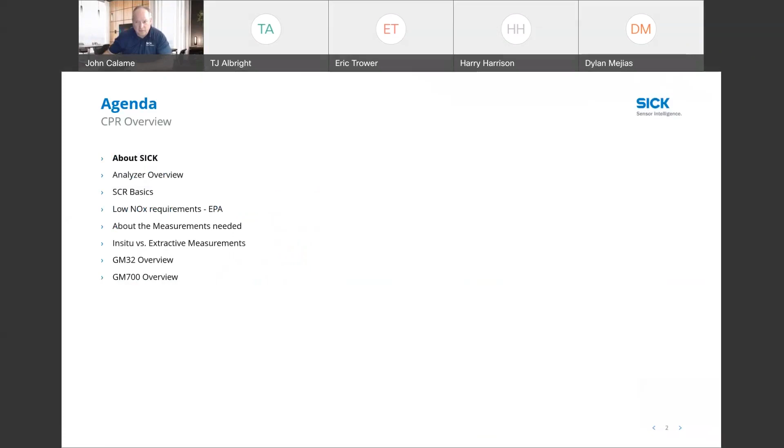Good morning. Thank you, Eric, for the introduction. Today, we'll be discussing analytical measurements to help meet the EPA NOx regulations. I would like to give you a quick overview, for those not familiar with SICK, of our capabilities and our footprint.

Erwin Sick founded the company more than 74 years ago. It's a privately held, family-owned company, grown from just a garage operation to 11,000 employees worldwide. A great success story, global coverage, and over $2 billion in sales globally.

We have a really wide product and technology range. Lots of sensors. You may have heard of us for analyzers or for flow meters, but we have over 40,000 products that we produce. One of the great things about working for SICK is they put a lot of money back into R&D. We reinvest 10% of our annual revenue back into new innovations and new products.

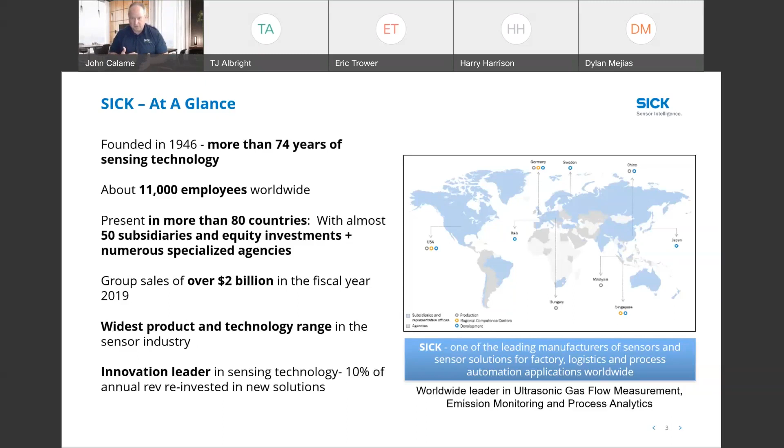If we go from left to right, one of our divisions, our global business centers, is responsible for presence detection. We have lasers, high precision lasers that measure from micron to mile, so very precise proximity measurements. One of the very first products developed by Erwin Sick was the industrial safety light curtains, which you may have seen in factory automation. They protect employees from machinery and injuries. We'll do the complete safety audit for you and a turnkey system.

The analyzers group, which I work with, I'm the market product manager for. We have both compliance analyzers as well as process analysis solutions. For flow measurement, we have a very robust offering for ultrasonic flow measurement, one of the leaders in custody transfer measurements for natural gas. We also have a very robust flare flow metering, which is a very challenging application that we do quite well and are known for.

Then we have app space and industrial integration, so customers as well as us can take our products and develop custom applications and designs. We also have a systems integration group where we can take third-party products as well as our own and integrate them into complete solutions. Then motion control, we have rotary linear encoders, contacting and non-contacting. And for trace and track, we have identification and measuring RFIDs and 2D cameras for that business.

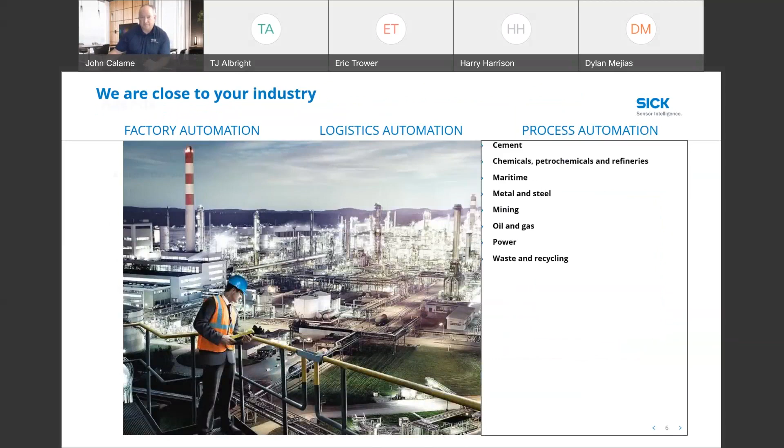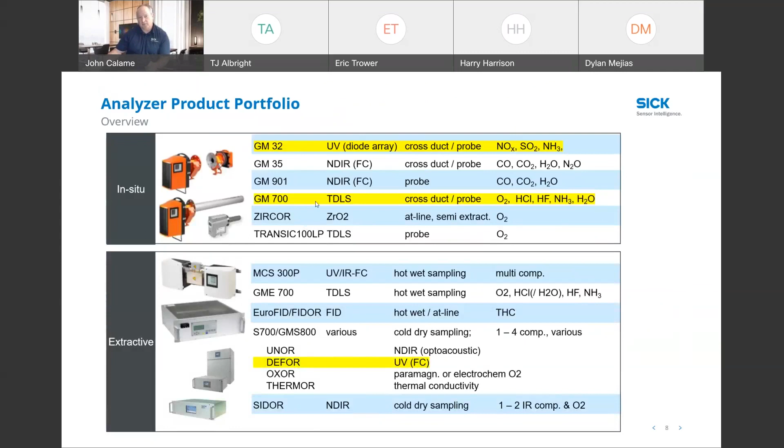To get into our analyzer portfolio, we have both in situ and extractive. In situ means the analysis is taking place in the process or in the stack. Extractive means there's a sample system that's conditioning the sample and bringing it to the analyzer for analysis. The key analyzers we'll discuss today will be the GM32 and the GM700, TDLS, and the DEFOR.

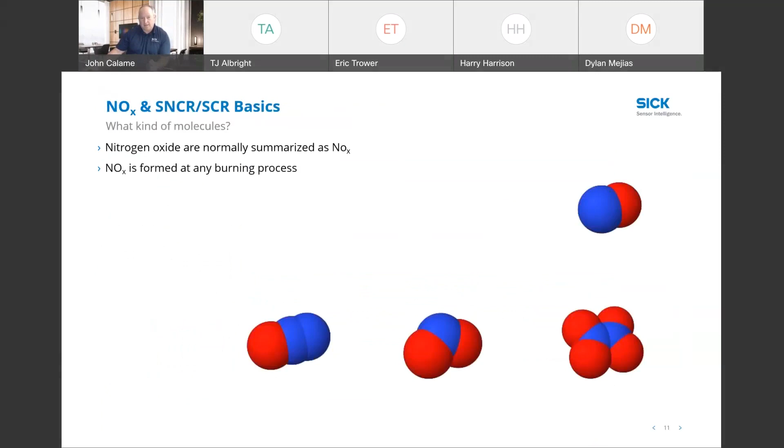Just to show you, we have a broad offering, certainly O2 for combustion control, and then we have a MERCEM for mercury, a variety of different other analyzers to meet both your compliance and your process measurement solutions. But today we wanted to talk about NOx. So what is NOx? Nitrogen oxide, or oxides of nitrogen. It comes in many forms, and it's created during the burning process or combustion. We're also going to talk about the DeNOx process and some of the removal methods for NOx.

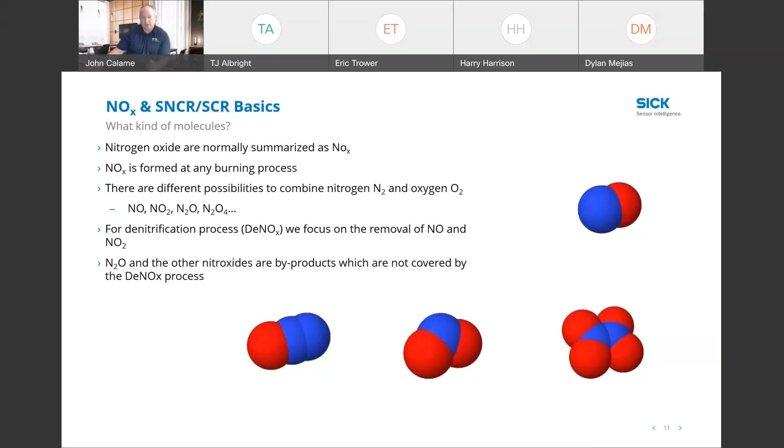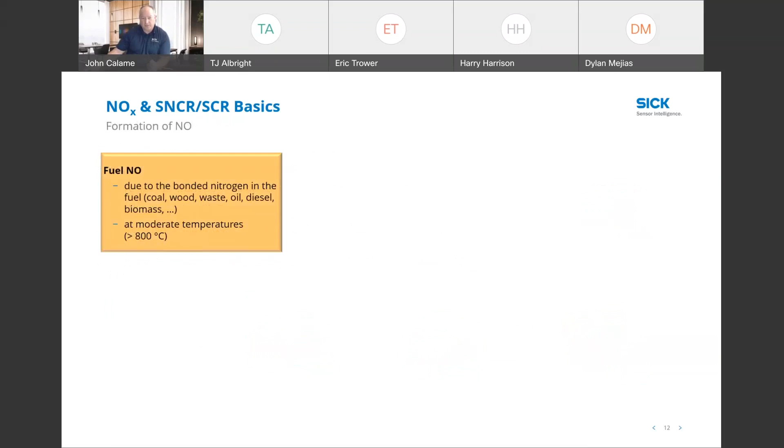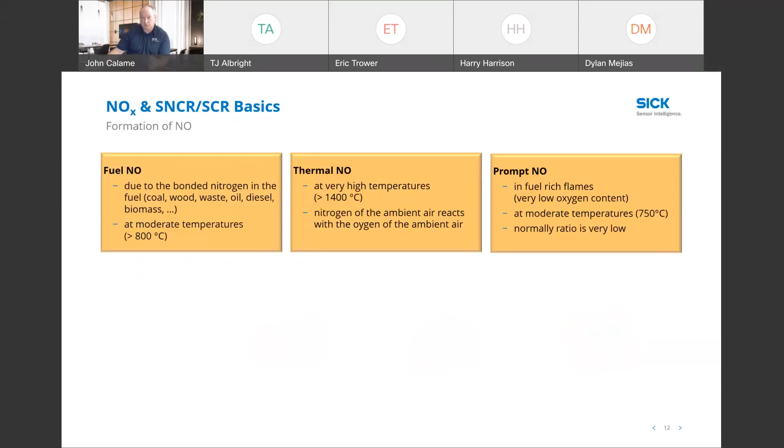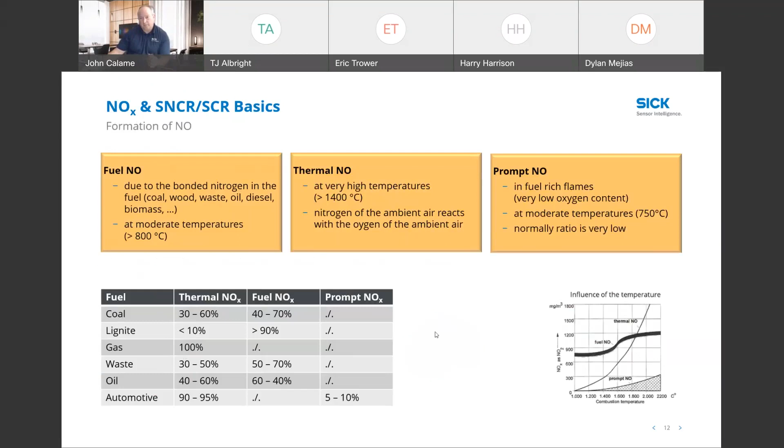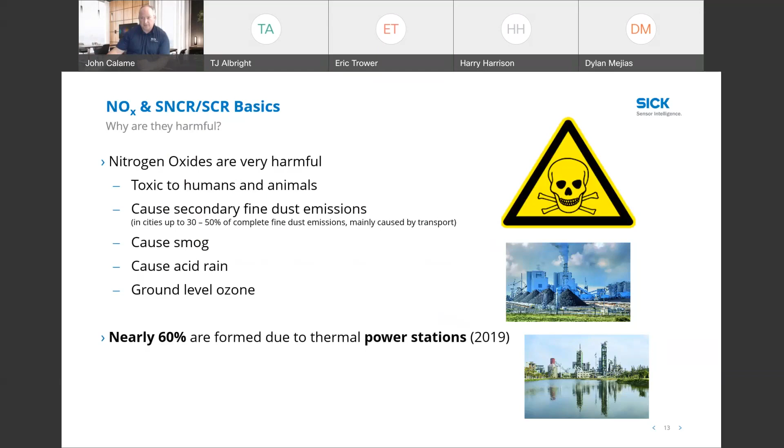So why would we measure NOx? Of course the EPA has guidelines, and we have to do that to be in compliance. But the main reason is that there are harmful effects from nitrogen oxides - it's toxic to humans and animals, it can cause smog and acid rain, and contribute to ground level ozone. A lot of thermal power stations and power plants create and account for quite a bit, but there are multiple sources - automobiles and any combustion process can produce NOx.

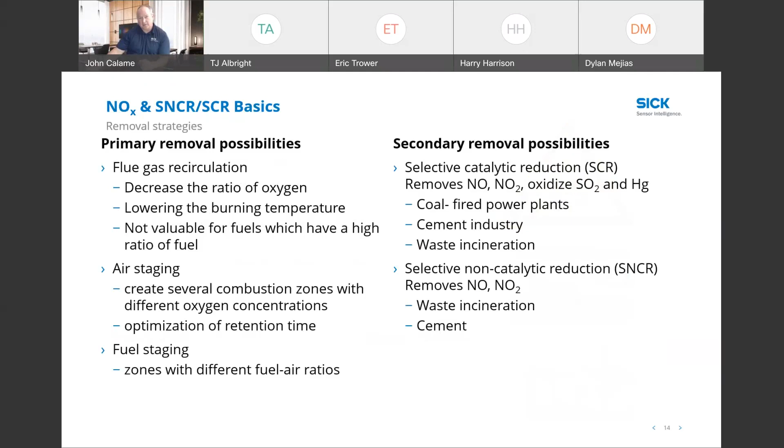So there are several removal strategies. The ones we're really going to focus on today are SCR, selective catalytic reduction, and SNCR, selective non-catalytic reduction. But there are other ways to remove or mitigate NOx, like low NOx boilers, or increasing combustion efficiency to make sure you're not in a fuel-rich situation. So there are multiple ways to mitigate NOx, but whatever strategy you use, you still have to measure the effectiveness of that and meet your permit requirements via EPA or state guidelines.

To explain the two briefly: selective non-catalytic reduction uses direct ammonia injection to convert NOx into water and nitrogen. Selective catalytic reduction uses not only ammonia injection but also a catalyst - injecting the ammonia prior to the catalyst, reacting all the NOx that's in the stack, and then converting that to water and nitrogen.

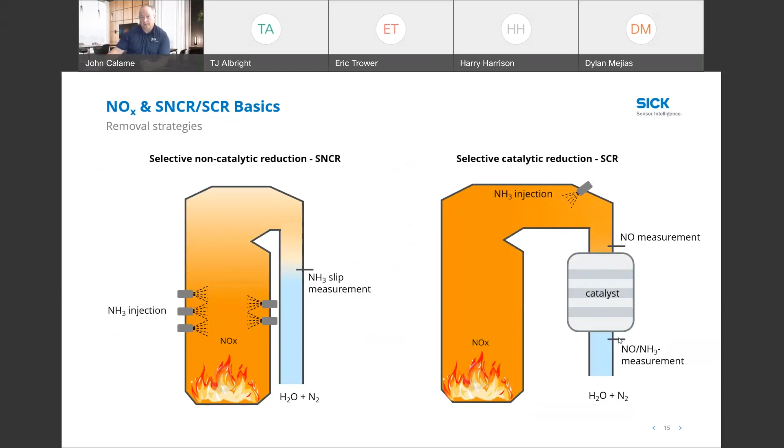So the SNCR principle and the reduction removal of NOx - both are viable. We're not promoting either or, it depends on your specific application, what your loading is, your NOx levels, your fuel types. There's a lot of things that go into selecting the proper removal technology.

But what we do very well is have analyzers that measure the ammonia and also the NOx in situ, which is a real fast measurement, and it allows you to optimize either the SNCR or the SCR to make sure you're not over-injecting ammonia. If you over-inject ammonia, there are effects of reducing the cost or life of the costly catalyst. Also, ammonia is not cheap, so you can reduce the amount of ammonia used as well. So there are financial reasons why you want a device that gives you tighter control, allowing you to optimize the performance of the removal technology selected.

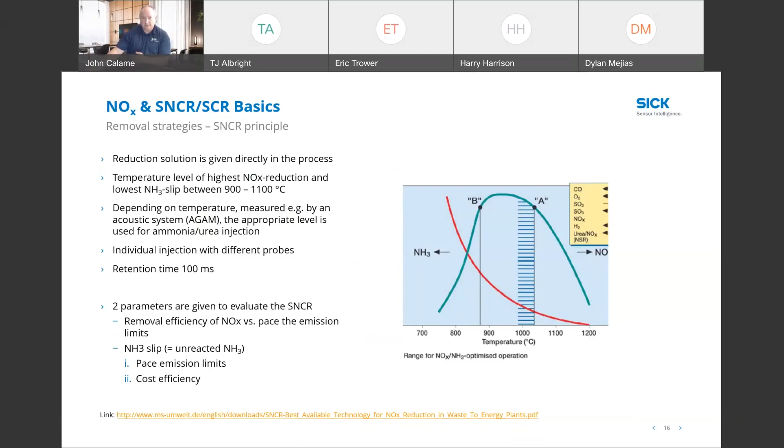So the SCR principle we're moving to is actually using that catalyst as well as the ammonia injection. What we're doing is measuring that slip that comes through, the ammonia slip. What we call ammonia slip is - you want enough ammonia in there to fully react and remove all of the NOx. The only way to measure that and make sure you're going to have enough is you have a little bit of residual on the downstream side that's going to break through. So we're measuring that really low level breakthrough to make sure you have enough catalyst or enough ammonia along with the catalyst to effectively remove the NOx.

Yeah, this is Dylan. For that low slip, you're looking at probably sub 5 ppm, really sub 2 ppm of ammonia for an optimized conversion. So you do need a device that's very accurate on the low end. A lot of devices out there are good to the 0 to 25 ppm range for ammonia, but when you look at that low measurement and high accuracy at that low measurement, you're going to be leaning more towards something like a TDLS, which I think John's going to be talking about here in a bit.

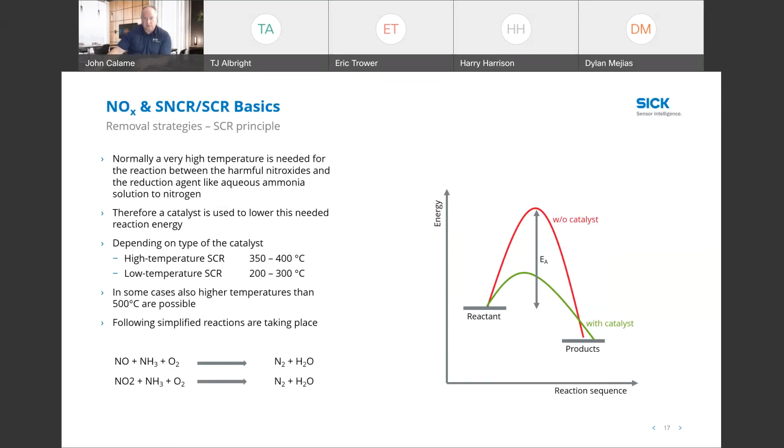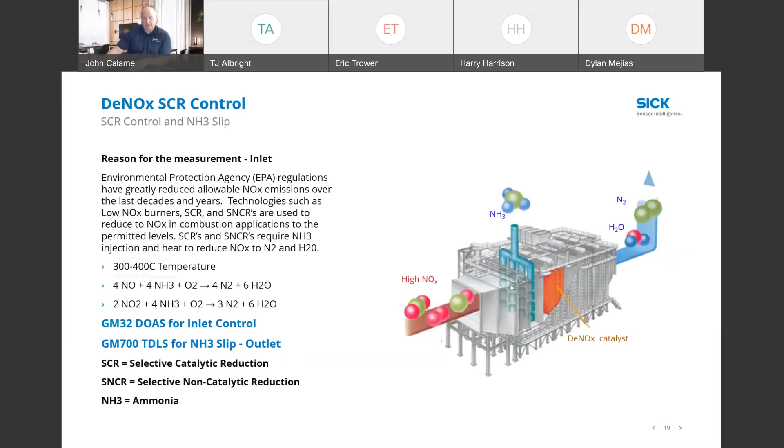For SCR control and ammonia slip, a picture's worth a thousand words. You have high NOx coming in from the stack, going into the SCR, and you're injecting ammonia prior to the catalyst bed. It reacts and converts the NOx into nitrogen and moisture, which are benign components naturally occurring in the environment. That's the basic premise of how SCR and SNCR work.

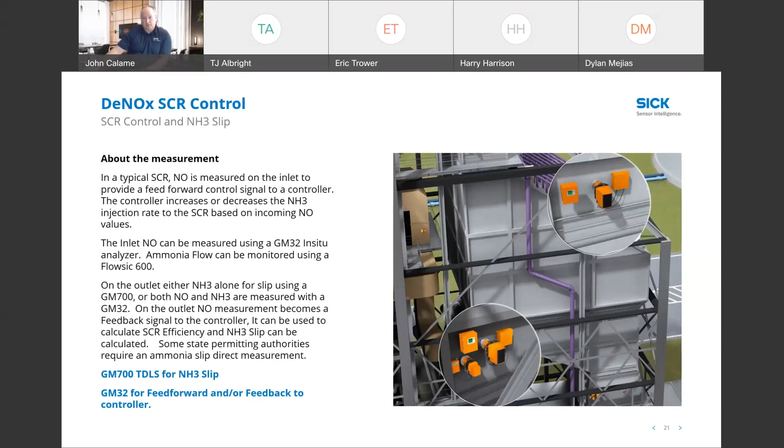The DeNOx and SCR control shows a typical install with our devices, where we have the GM32 on the inlet measuring the actual NOx, giving a feed-forward signal over to the ammonia injection so they know the loading and NOx levels, so you know how to adjust your ammonia feed and not overfeed. Then we can measure, with the GM700 TDL that Dylan mentioned, the ammonia slip quite accurately, so you know what's slipping through and can ensure the proper amount of ammonia. We give you the feed-forward to optimize control.

We've talked about the benefits of proper injection control. One is that too much chemical can cause corrosion. We also talked about catalyst life—some catalysts are very expensive, several hundred thousand dollars—so you can extend their life, and there's a definite ROI calculation that provides significant cost savings. Also, storage of ammonia and the product itself isn't inexpensive, so if you can reduce the amount you use, you reduce the total operating cost of the removal technology.

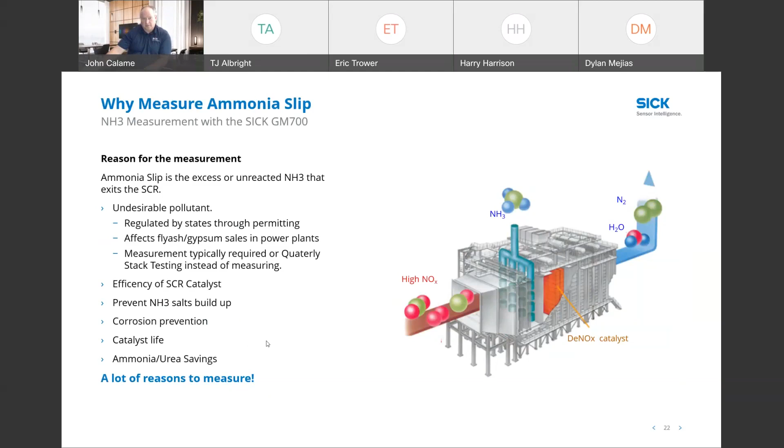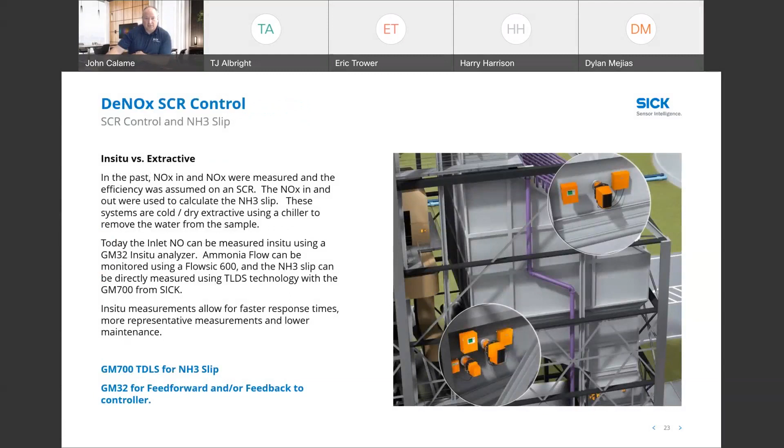But we also manufacture and supply hot-wet solutions, where we keep the sample above the dew point as we extract it and bring it to the analyzer. It's heated—heated sample line, umbilical, pump—all the way through the analyzer, staying hot above the dew point. It's a robust system for applications with high particulates and for measuring acids that might otherwise condense.

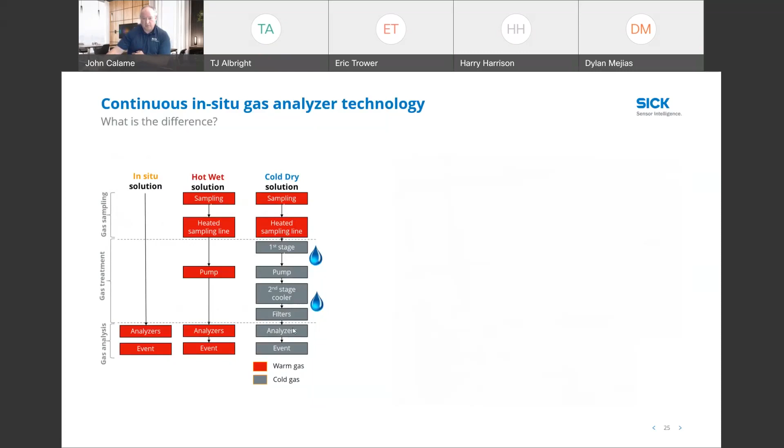We can also do hot-wet extractive or cold-dry extractive strategies. A lot of the cold-dry extractive method is used on traditional CEMS measurements for NOx. All have their pros and cons. The cold-dry system has more components because we're doing extraction, cooling, and dropping out moisture—there are many filters, so more components are involved.

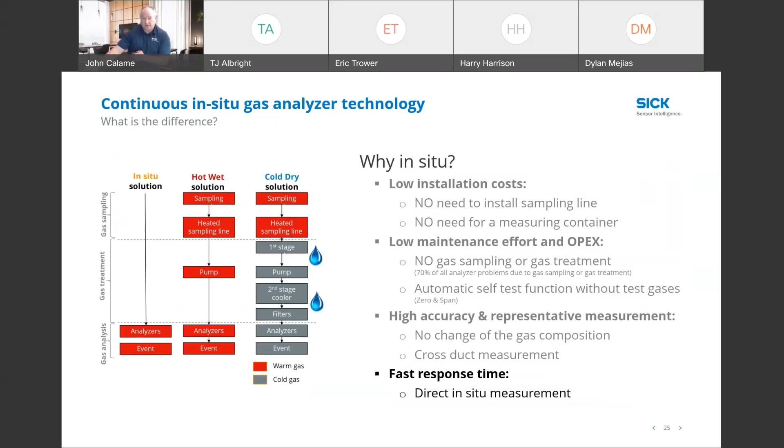The best thing about direct in situ measurement for controlling and optimizing is the speed of response—being in the process rather than dealing with an extracted sample's delivery or delay time. Dylan, anything you wanted to add to that? No, nothing on this.

One of the huge advantages of the in situ device is our capability to mechanically perform daily validations with zero reflectors and span filters, doing daily checks and verifications without calibration gas. We all know calibration gas, cylinder gas, is expensive to procure and maintain. Think about how much a cylinder of gas costs you—if you had to do that 365 days a year, maybe going through a cylinder per quarter, that's four cylinders, or maybe one a month.

You can do your own calculations on how much money that would save you. And we all know the analyzer is guilty until proven innocent. So if you have to challenge the analyzer, or if there's a challenge from operations that it's not working, you can physically hit it with a digital signal, send it to the analyzer, and then you have positive indication of performance.

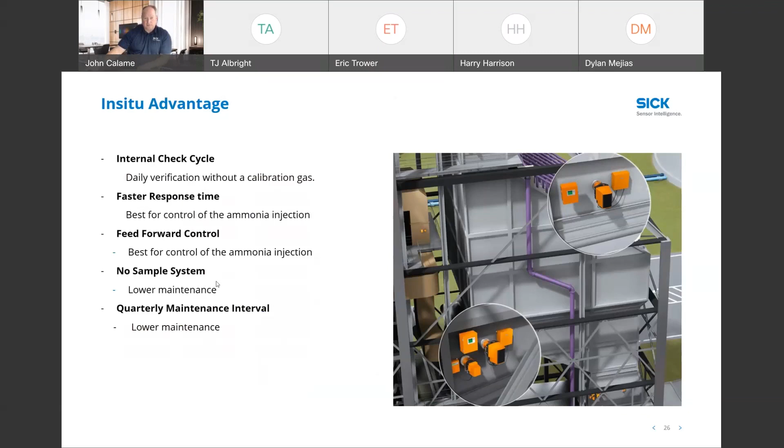That's huge when you have a question about the analyzer operations or readings. You can initiate this verification cycle for testing as well as to meet the daily verifications via the EPA. You still have to use gas for your quarterly checks, so we can still introduce gas to the device - you'll see how that's accomplished coming up. We can do both live gas as well as mechanically online without removing the analyzer, via a mechanical device with filters. The nice thing is the speed of response - we're not conditioning or changing the sample, and there's no sample system on it. The maintenance and install cost is typically lower than an extractive system.

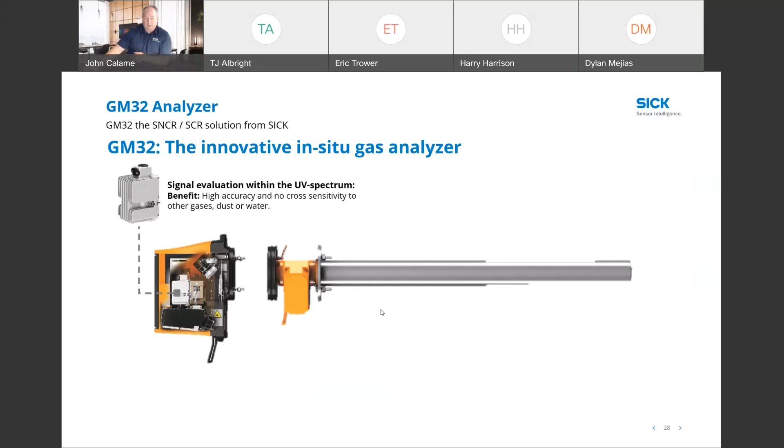It uses UV technology, a UV lamp, and can measure the four gases plus pressure and temperature. As mentioned before, it can do the rotating span filters and also the zero reflector to do your daily validations mechanically while the unit is functioning and online. There's also an auto alignment correction to make sure all the optics are continuously aligned for peak performance.

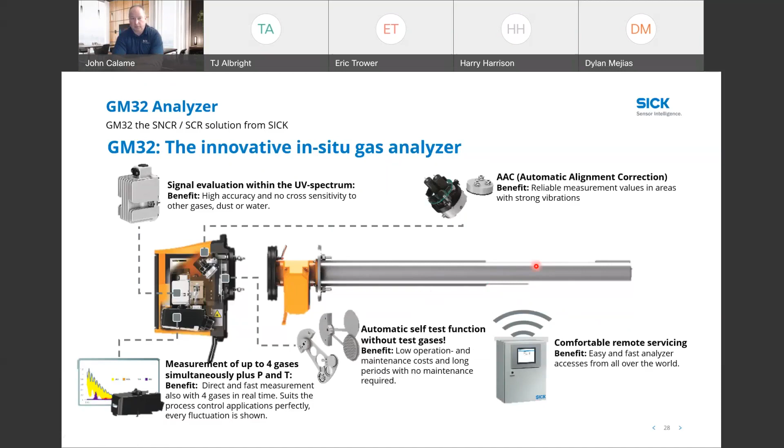The good thing about this is the GM32 comes in 3 different configurations. You see the probe right here - this is the purged air probe. If you don't need to put it on test gas every now and then, you can go with this open path purged air probe. There's also a filtered probe, usually a ceramic filter, since at very high temperature the Teflon filter typically won't hold up. It does have a cross-duct application as well - usually installation is easier for single-sided insertion, but cross-duct is an option. That's what's being shown here, the GPP.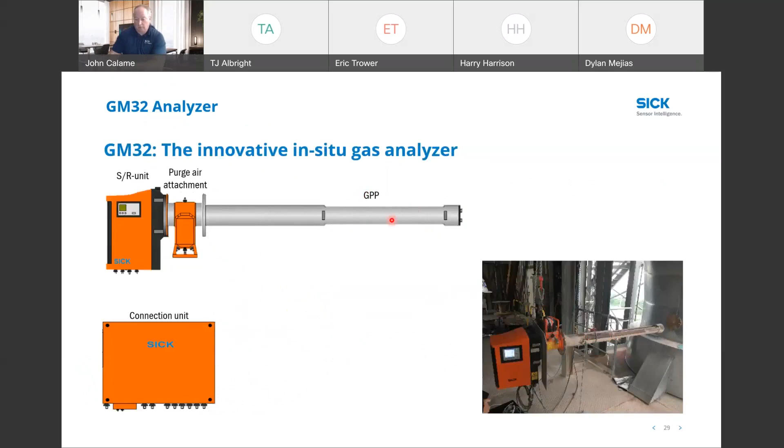Jumping to the GM700, which is a TDL, tunable diode laser spectroscopy technology. We also have the same single probe design as well as cross duct for that product.

Okay, thanks, Dylan.

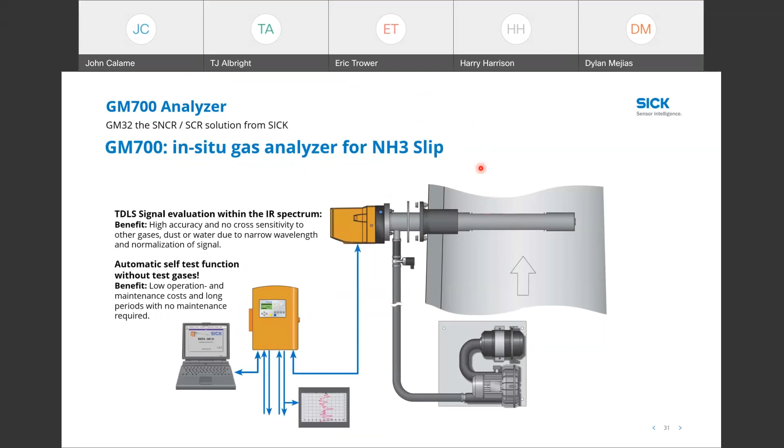As Dylan was talking about, this is the single probe design, and this is a cross duct. Depending upon your application, your ranges, and physical constraints of where you're mounting the device and where you have access, that will determine which one you would use. Both would work, but one may work better for you. You may have access on only one side of the device, as far as platforms, and it might be more beneficial to put the single probe in - it's usually easier to install because it's got one connection. But if the application dictates as far as range, and we need a larger optical path, that might be one reason for going with the cross duct.

But typically for both the GM700 and GM32, they are in situ measurements, so they do have a lower initial cost for installation, lower maintenance cost, lower cost of ownership, and fast response because we're not modifying the samples in situ. It's a very fast response time. And then we do have the different variants: cross-duct and single probe.

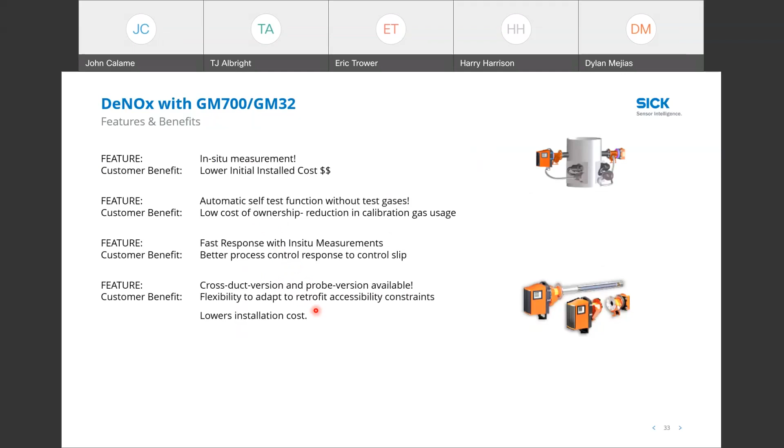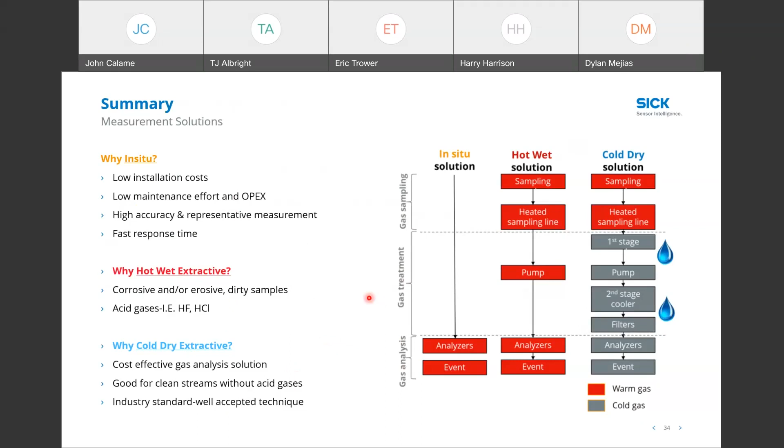So in summary, we talked about the measurement solutions and the benefits of in situ. But if you do have an application where you need hot, wet, or cold dry, we have all three. We'll do an evaluation with you and your team, evaluate the information of your application, and recommend the technique that's best for your application, allowing you to make an educated decision on which measurement topology to use.

So what we discussed today is how NOx is formed, what it is, why we should care, why we should measure it, and what the removal methods are. We concentrated on SCR and SNCR. We talked about the benefits of in situ measurements and optimizing the SCR control.

We talked about how SICK has all three technologies: in situ, cold dry, and hot wet extractive. We have experts, MAEs, and an engineering team that would be delighted to talk with you and your team, either at your site doing site surveys or virtually, whatever is more feasible, so they can really look at your application, find out what your needs are, and come up with solutions to present to you.